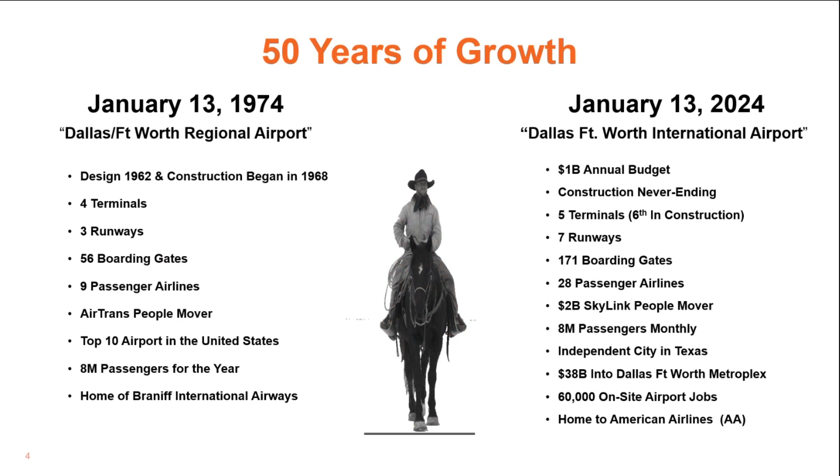So 50 years of growth from January '74 to now, there's a lot of things that really exploded - more runways, more gates, more terminals, more money, bigger budgets, etc. And here's some stats here. I'm not going to read them all to you, but here's some top 5 stats on the planet. We're being compared to airports like Shanghai, Dubai, London, and so forth. So it's right in your backyard.

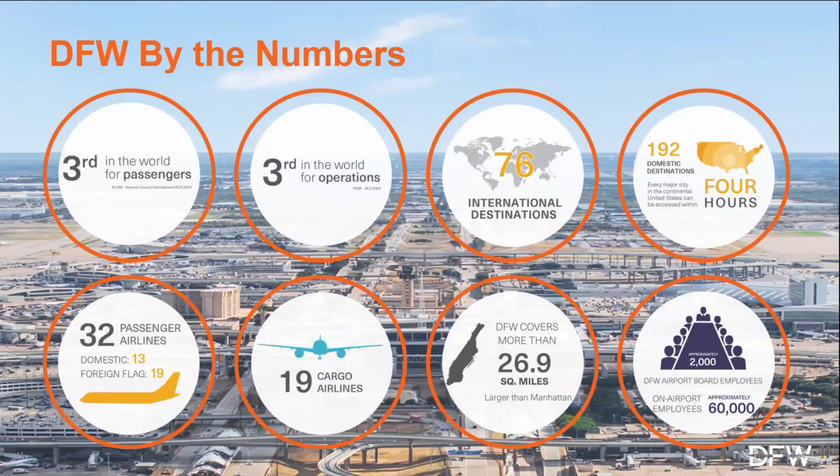So as you know, we're here as part of a monumental task, which is ongoing now. Billions of dollars going to be spent, over about 12 billion, on new capital projects. And there's more coming. This is just what we see now, but there's more coming over time in different phases and different fiscal years.

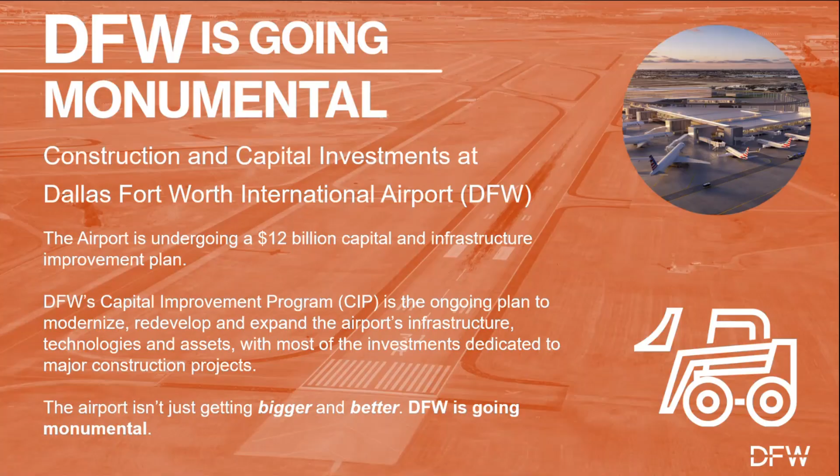We fixed them with fracture critical repairs to buy us time. And then it was decided, instead of putting these left-hand bridges back in where it's confusing and dangerous for getting people off the road, to put them to the right. And that's what this project's all about.

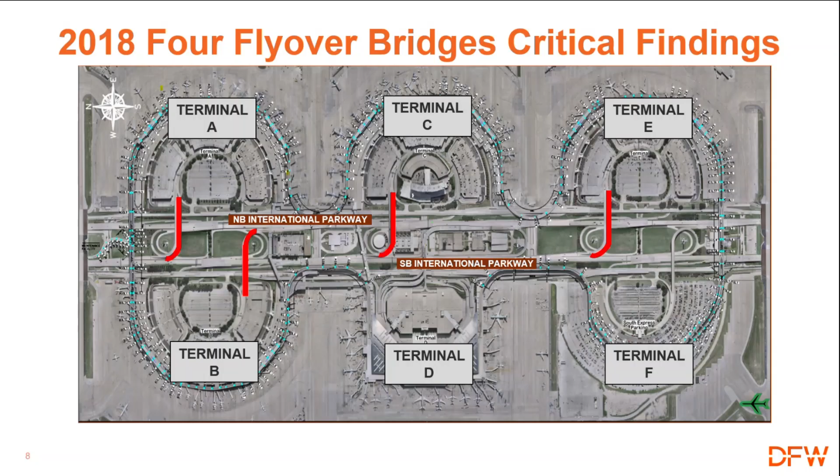So it's this bridge right here. And if you ever travel to the terminals, you had to cross it. It's a 755-foot bridge on the left side of the road, and it was built in 74 for fracture critical steel tub. And the problem is it ices fast in the wintertime, and that controls your passenger traffic in the wintertime.

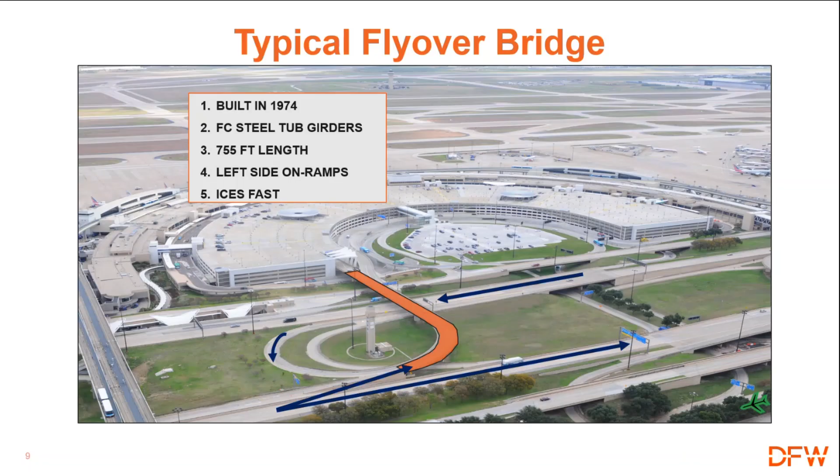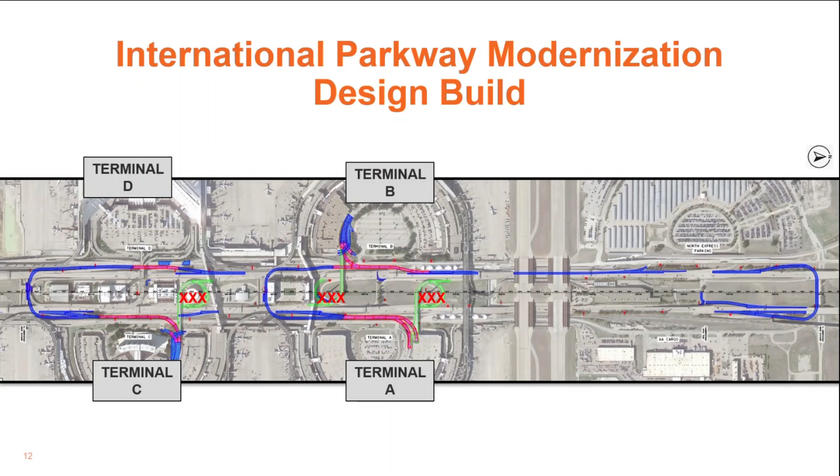And then, of course, our FIFA World Cup is coming up. So I asked for help. And the birth of the project is the International Parkway Modernization Design Build. And then my colleague, Veronica, will explain more details about it.

Good morning, everyone. So I'm the project manager for this baby that Harish gave us. I'm going to explain briefly about the numbers of the project and some of the details from inception to how we executed the project. So I'm going to give you a little background.

This project initially was a bid build project. What the owners saw along the design process, when they got to about 70% of the design, was that a lot of issues were not yet addressed. So we changed, or they decided to change, to design build. In this case, we have a qualification-based procurement, 2-step RFQ, RFP, and the importance of this is that the owner could perfectly cater what they wanted from this contractor. They highlighted experience and past performance.

We have requirements for firm and key personnel experience. Most likely, besides what we saw in resumes, we also called prior clients to verify how they collaborate directly with third parties. We also verified technical competence, construction phasing plan methodology, and we're going to see a lot of this in later slides. We also looked at safety, sustainability, quality control.

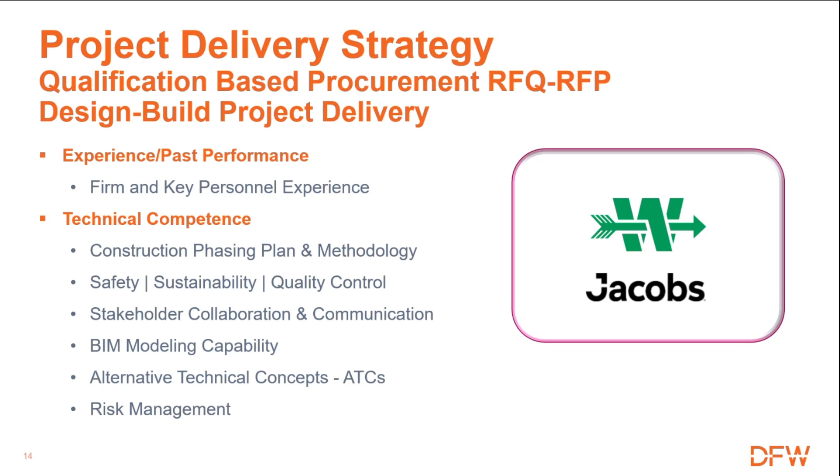Didn't mention, but of course, Jacobs and Archer Western were the ones chosen as the contractor for the design build. Now, one of the main items we want to highlight here is that the alternative technical concepts were ideas manufactured to be negotiated before we finalized the contract price. So for us, having this taken into consideration beforehand was a big advantage.

So we have here an example. What we see here in red was the original design. We see a lot of intervention, closures required to build these sections. So what the contractor proposed was to realign the entrance to the right exit to Terminal B. In this case, they also modified how the exits and entrances to the different terminals work, allowing us to avoid all these interactions and impacts into the terminals.

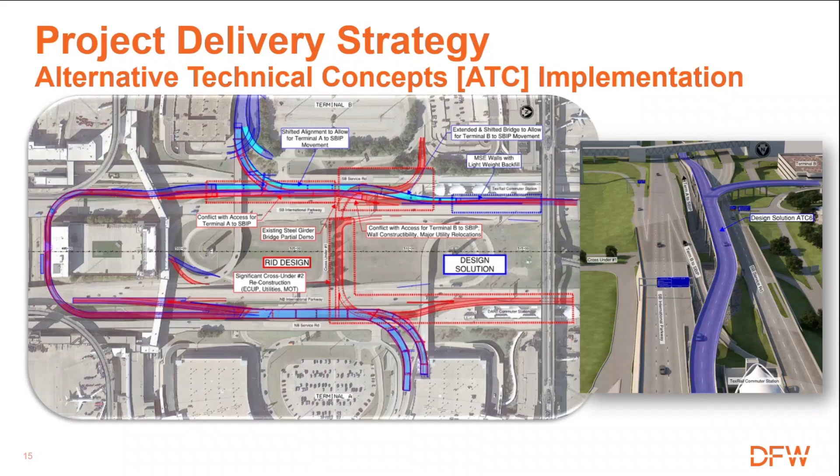So again, these were qualifiers that were considered when we were choosing our design builder. So the project by the numbers: the project was awarded, final contractual negotiated, at 206 million. Now we have contract plus change orders of about 365 million, and I will clarify, all of them were directed by the owner to address critical issues. The project length is about 3 miles. It does not sound like a lot, but this is a very restricted footprint, so we are going to see along the presentation how we address that.

Construction, MWBE goal: 30%, designs at 22%.

The proposal was due January 20th, and we notified the design builder on February 10, 2023. So you'll see a gap of about 9 months between the notification and when we provided NTP. I'd say this was a very intense negotiation, most likely to address those ATCs, and also for the contractor to work with us to adjust to the budget the airport had at that time.

We have substantial completion for base scope of October 14th of this year, and this is without considering major change orders that are modifying that date.

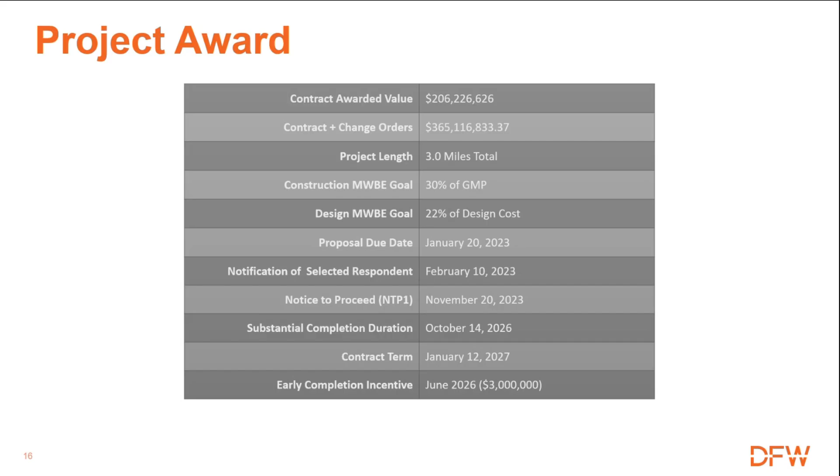This is the project schedule, most likely aligned with what I'm telling you. We already have terminals B and A open. We're working on C. Again, substantial completion for base scope is October 14, but we're shooting to have this ECI date of June 5th addressed.

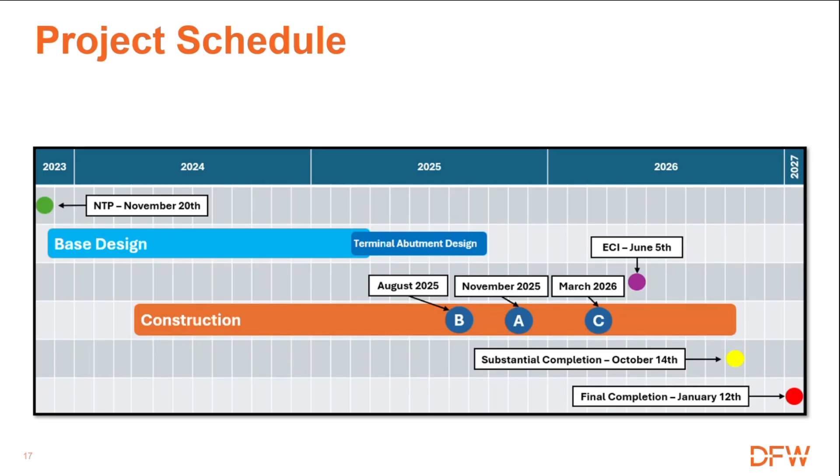Now, project execution. We're going to talk a little about design and the digital tools we're using. The main focus of the design development was to build with fast track, of course, the advantage of design-build, but also to do most of the work offline, doing the least impact to operations on existing traffic.

So what we have is that we scheduled the design deliverables aligned with the fast track construction timeline. Of course, there were early start of construction submittals that allowed the contractor to work as fast and as soon as possible, but also there were different adjustments like alignment adjustments to keep work off existing traffic routes.

Like you see in this picture, most of the alignment is off. We try to minimize as much as possible the impact. In this case, we're minimizing impact to existing infrastructure left in place, reducing the risk for utility relocations through design optimization, early coordination, and dynamic adjustment of maintenance of traffic.

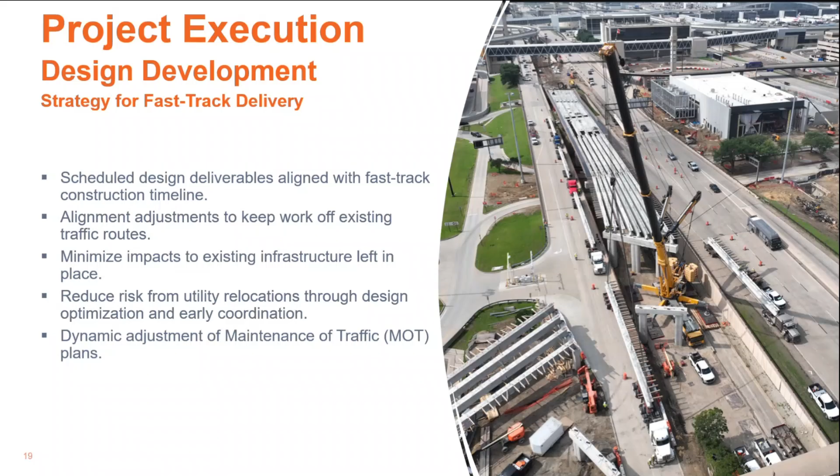These are a couple of examples of how we apply design optimization. In this case, this was the alignment I showed earlier, but then this was a further step where part of the infrastructure had to be built on top of the existing rail station.

What you see here in yellow are existing soil nails that had to be kept in place. So what we have to build here is the bent, an abutment, and most likely surgically identify where these soil nails were located, with a lot of potholing involved.

Besides that, to try to intervene the least and not produce additional loading into that existing wall, there was the use of this lightweight fill material made of glass. You can see here how the advance of this work took place.

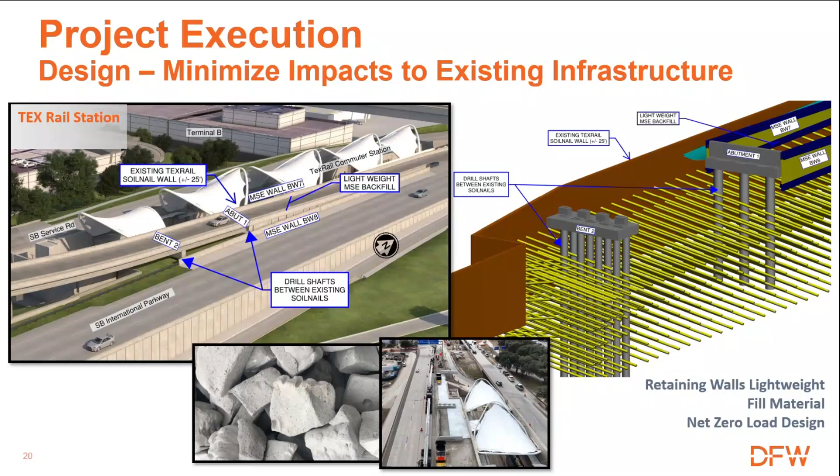Another major design optimization we saw through the project was the management of utility conflicts. Initially, we had about 114 identified potential utility conflicts. Through design, that was mitigated to only 9 requiring relocation. This was a big win for the team, since impacting one of these utilities is critical for the operation of the airport.

This is an example of jet fuel drain lines that cross between terminal A and B. In this case, instead of relocating or touching those drain lines—we know nobody wants to get delayed because there's no jet fuel in the airplanes—a protection slab was the solution.

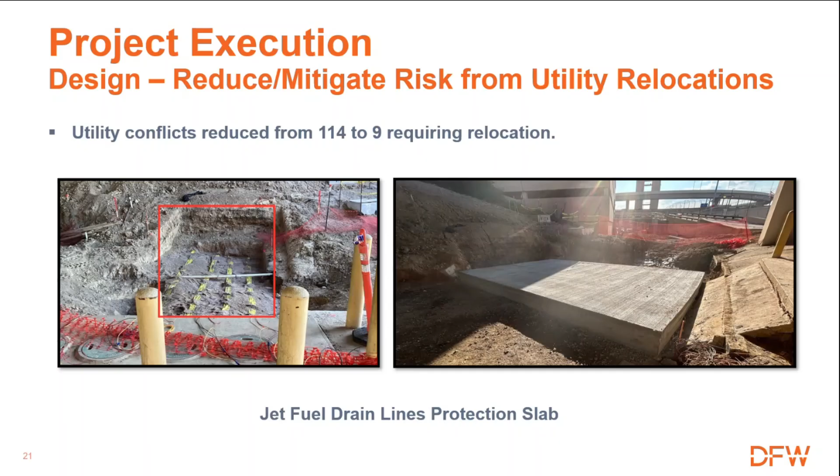Now I'll ask a rhetorical question: who here has arrived the 2 hours that the airlines recommend before your flight? Oh, a very good amount of people. That's good. I'm asking this because I want you to think about all the steps we take to make a closure.

Before we put a closure in place, we first align with the owner's moratorium schedule. For those not familiar with airport operations, the moratorium is a specific time where the major flight volume is taking place. It's seasonal, but also tied to specific events happening at DFW.

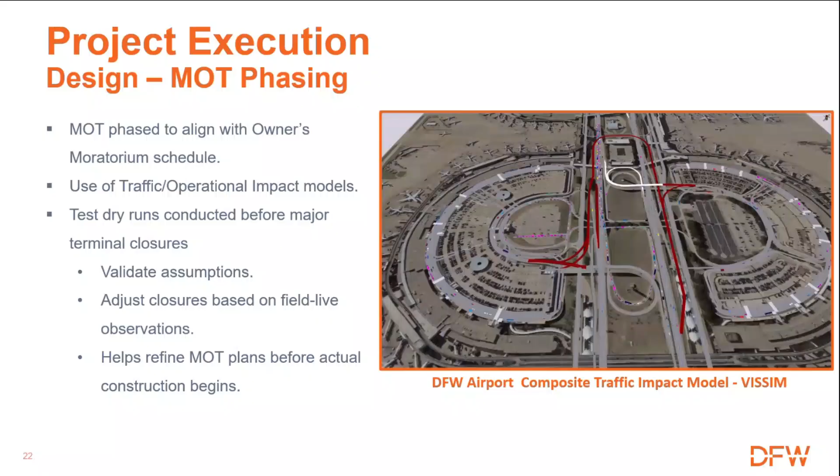We also make heavy use of traffic models. In this case, this is an example of a VISSIM model. We see how the model predicts the behavior, and then we make adjustments over every step.

After that, we also do test dry runs, so we test the closures as the condition is going to be during construction. Adjustments are made again, and we can validate those assumptions, adjusting the closures based on field live observations and then refining these MOTs.

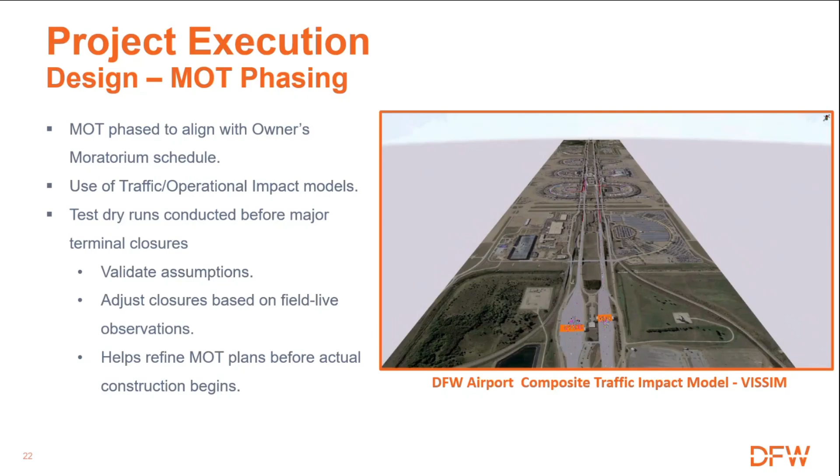Now we want to share a little of the technical, or let's say collaboration tools that we use. Of course, most of you are familiar with the use of Bluebeam Revu.

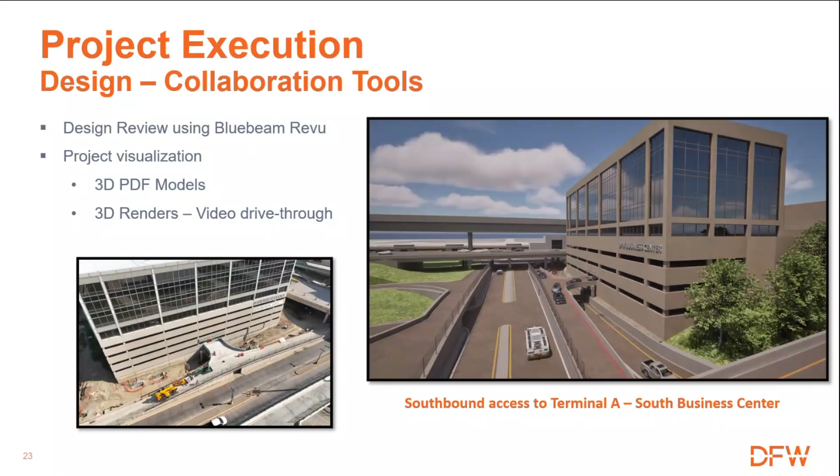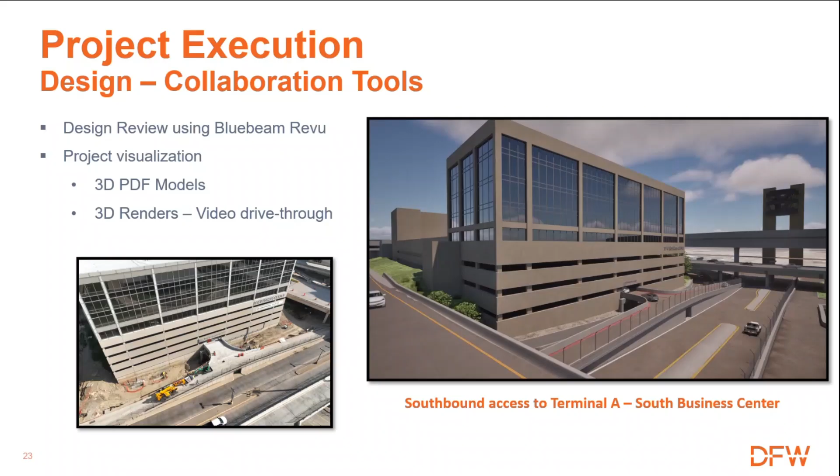We have project visualization tools like what we're showing right now, where we use 3D PDF models. These renders are very useful to communicate information with people that are not technical. They can show how their new route is going to function and also help facilitate why we need to do some closures. There are people who think, why do you need to do that? Well, we cannot build this bridge without taking it down. So these are tools that help familiarize non-technical people with how we are going to be developing construction.

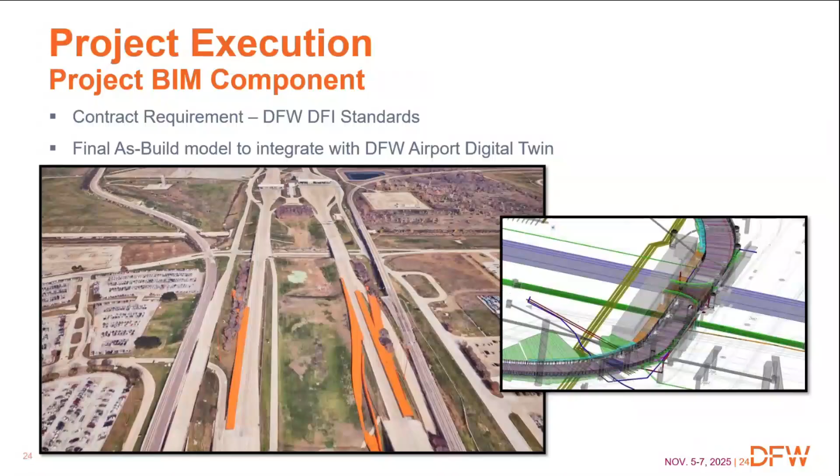How's it going, everybody? Did anybody happen to record that introduction? Nobody's called me distinguished before, so I want to show my kids that and take it back to the office. I've never been referred to as a distinguished guest, so I appreciate that.

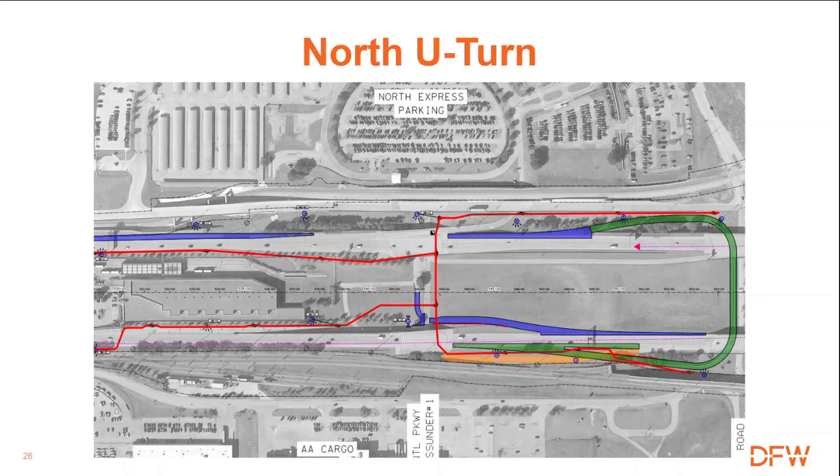Now, this wasn't always the alignment. The original alignment that was handed to us at the 70% level, which was developed by WSP, was what you see in red. So early on, when we got on board on the project, working with the PMCM team, we identified this as a potential area to mitigate some of the risks that we saw the project have, which start off by this area right here.

This is the orange line that was built some time ago. The original design had an exit ramp here that required us to build a cut wall using drill shafts. Those drill shafts, you can imagine the spacing of them, but not only were we having to install drill shafts here, there's also a soil nail MSE wall here that retains the orange line. So there was a lot of complex constructability issues there, but there were also some right-of-way conflicts and easement issues with DART.

So that being one of the scary parts, that wasn't the scariest part. The scariest part is this. You got a transformer substation over there for the Skylink system. So the entire Skylink system's power grid runs right through there. There was a lot of unknowns in terms of what that impact would be with the roadway running right adjacent to it.

So when we sat down with the PMCM team, we came up with this optimized alignment, which did add about 2 minutes to the travel time, but the airport saw the value and benefit of switching to the design here, which is what you see in blue. Later on, we'll have some pictures, and I think we also have a video of what that ended up turning into. It's currently open; it was open last fall.

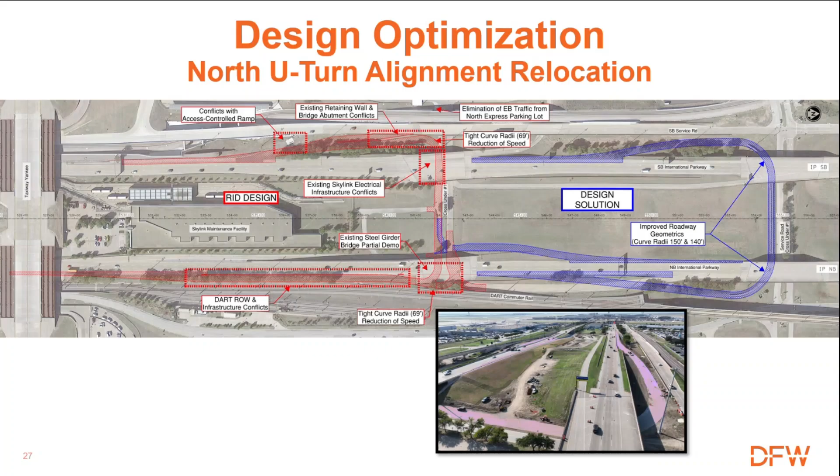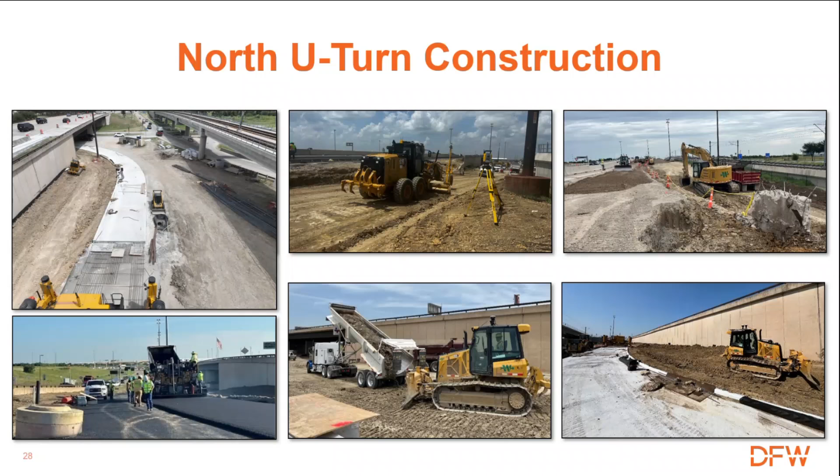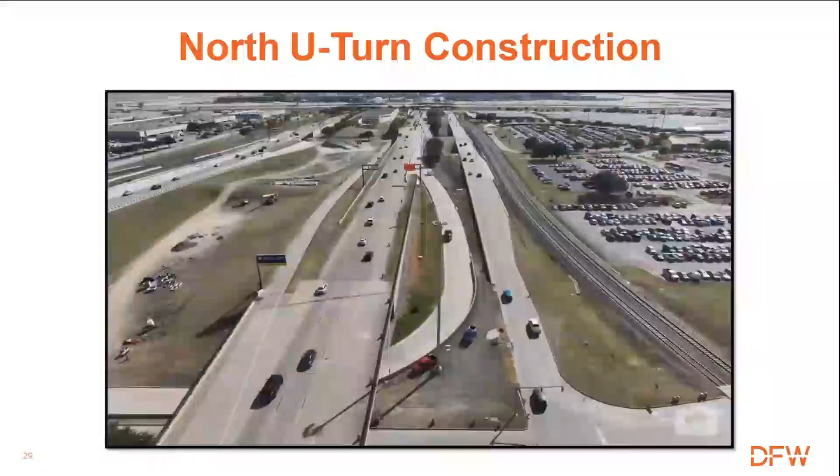And here's a video of what that alignment looks like. This is going northbound, this is east-west, and this is what the southbound direction looks like.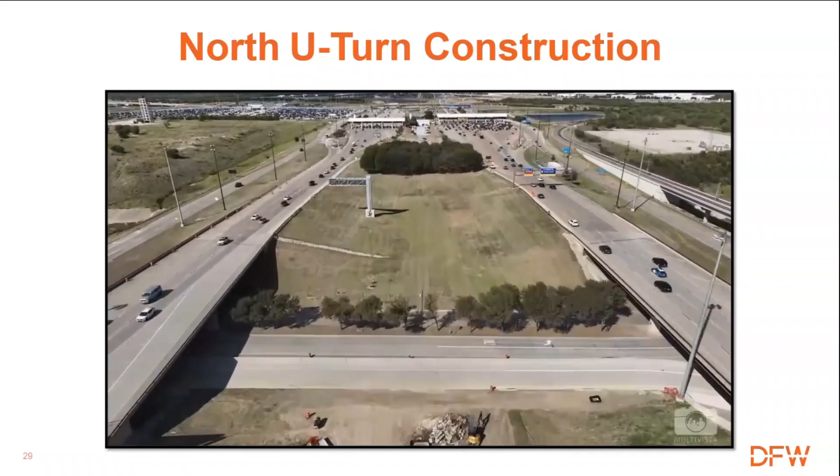We definitely spent a lot of money potholing to make sure that we did not run into issues. It was a Swiss cheese area, but I want to thank Jacobs. Lauren Van Andel was one of our design managers. It pretty much came to the point where it was like, where can we fit a drill shaft? It's going to go here. Designers, I don't care what you tell me, just make the numbers work, and we're going to go ahead and build it. Jacobs was very flexible and understood the situation we were in. I think that design changed three or four times before we finally got to where we landed.

What you see there is a solution that worked, and it was only possible via the design build delivery method. The importance of that, if I'm being honest with you, was not only the change of alignment.

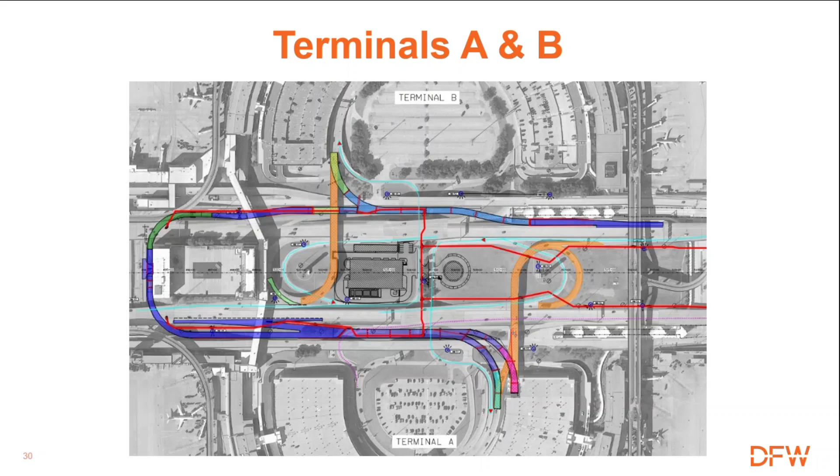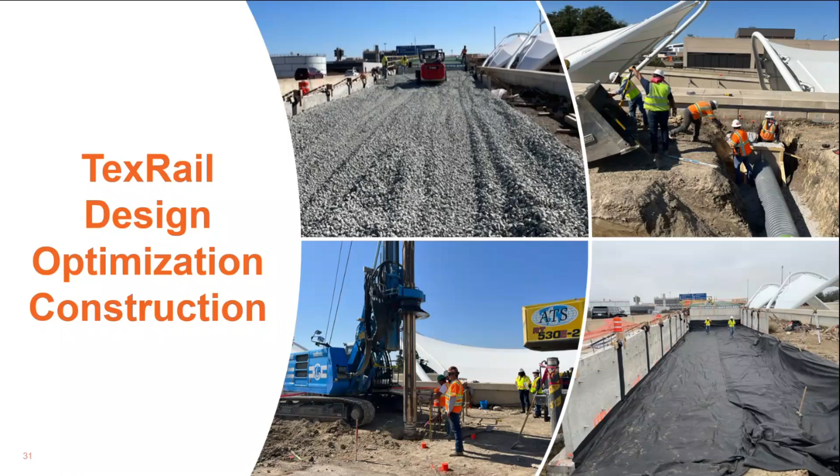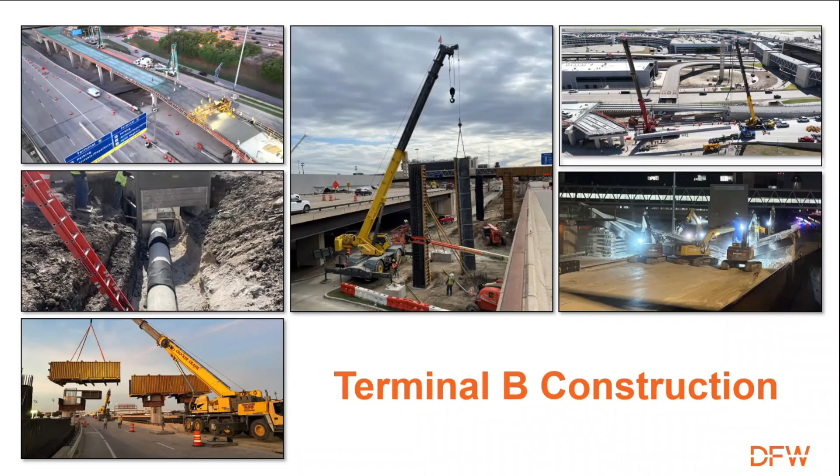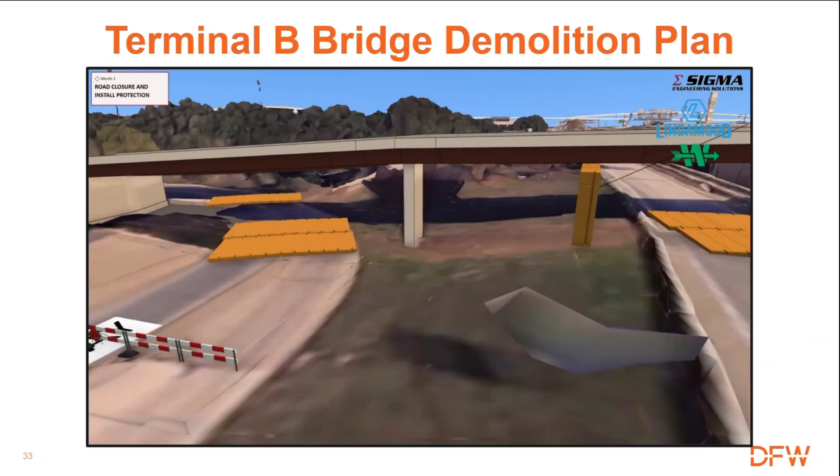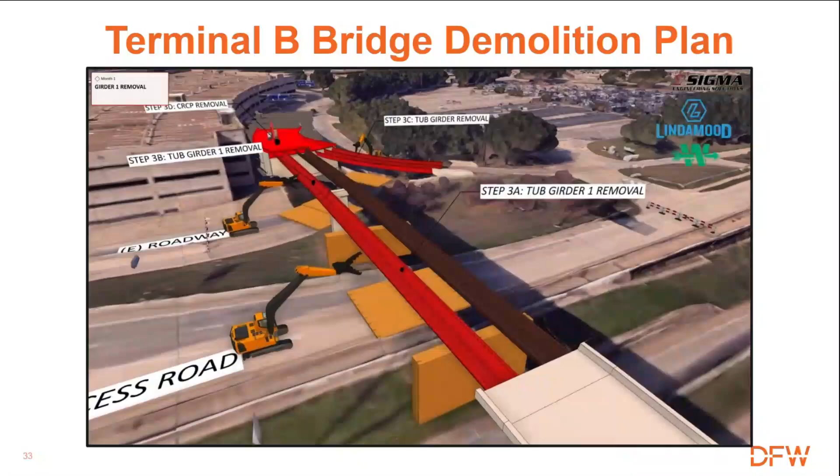We have some videos here that show how quickly some of the construction happened, coming right up. This is a video we created with Lindamood and Sigma Engineering out of Las Vegas. These videos have been very helpful for us to effectively communicate our plan to the owner rep, PMCM team, which is Veronica and her team. Her team then takes this and presents it to all the stakeholders at DFW Airport. You can imagine not everybody at an airport has a technical background or knows construction, so these videos are very helpful for them to effectively communicate what our plan is.

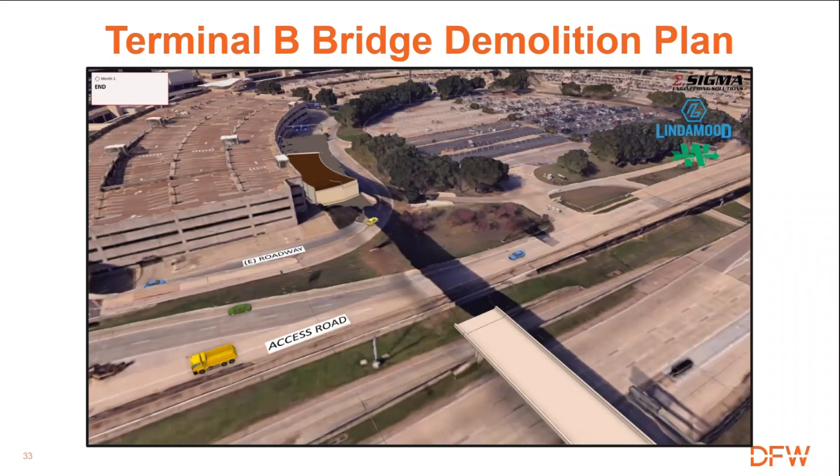This closure was permitted to be done over a course of about 72 hours, and Lindamood did a really good job beating that schedule. But this is what it looks like in real life - the pretty animation isn't always the way things turn out, but it gets pretty close. The rest of what you see here is the actual construction of how quickly our Archer-Western crews were able to rebuild the entire intersection.

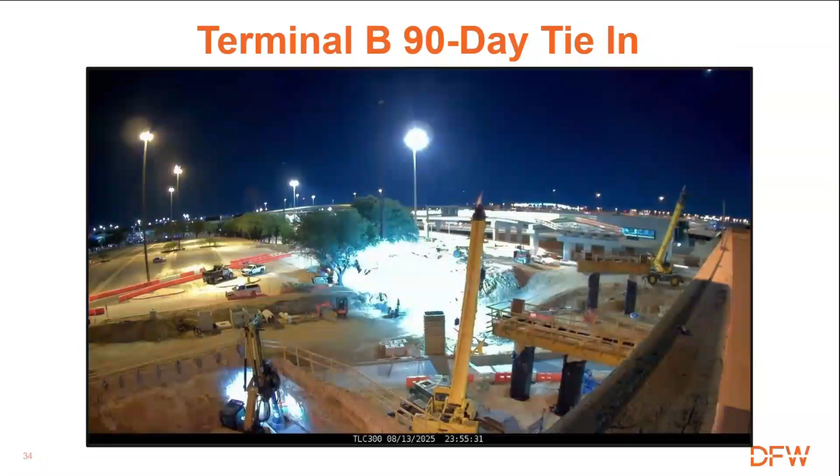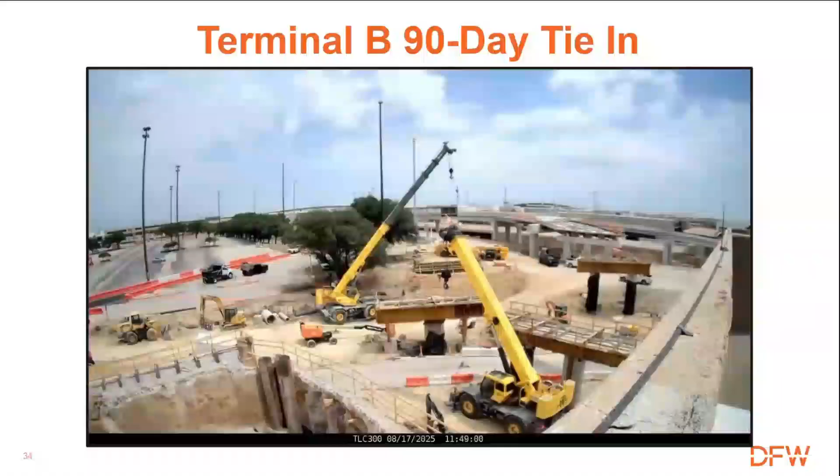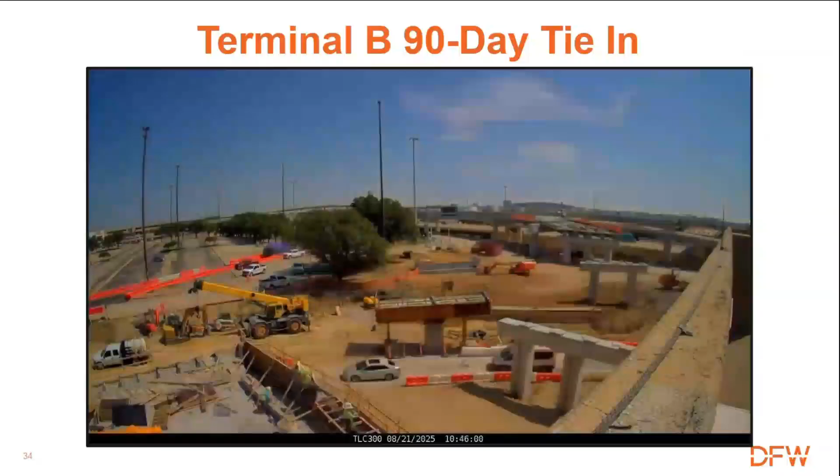We had 90 days negotiated with the owner to do all this. Now, it wasn't some kind of milestone, it was just our word that that's what we're going to do. In this particular location, we definitely beat the 90-day duration, and the owner was very happy with the results. Let this play out and you get to see how quickly this all comes together for us. We obviously were working day and night - you get to a point where we can't really double shift some of the activities, but wherever we could, we did.

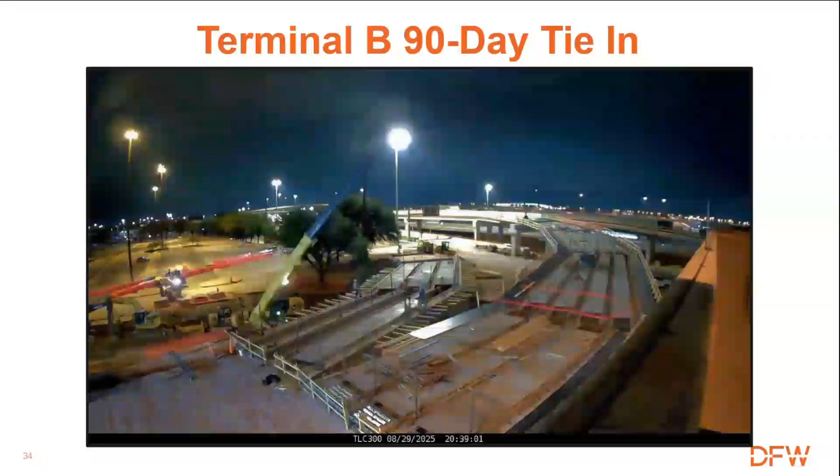The biggest thing too, I guess I should take a moment to pat ourselves on the back: we put in about 650,000 man hours on this project and we've had zero incidents, zero recordables. So it's been a zero, zero, zero project. We're very proud of that. Typically a safe job is a quality job and a profitable job, and it checks all three boxes for us right now.

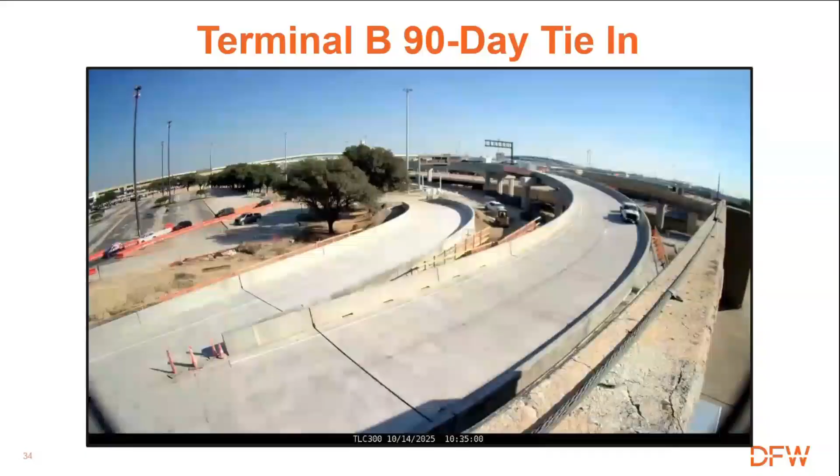That video shows you what the finished product looks like. Again, this was all built within less than 90 days. We just finished the lower roadway construction, which opened to the public Friday the 6th. All the lower roadway construction is now open in its current alignment, a new alignment.

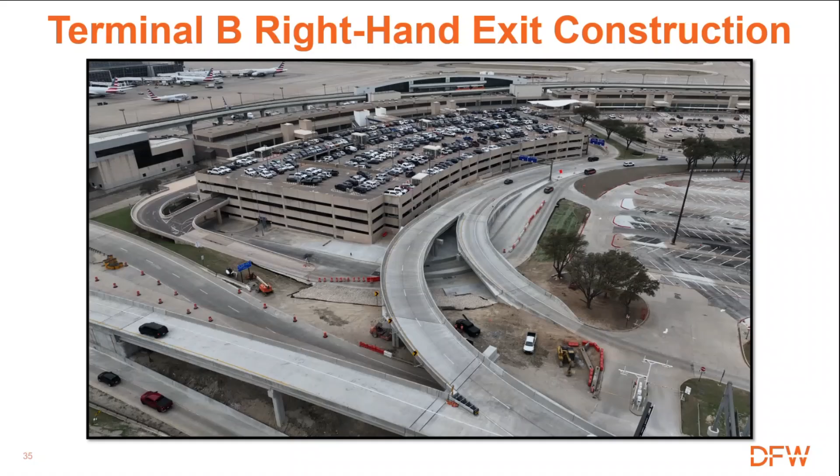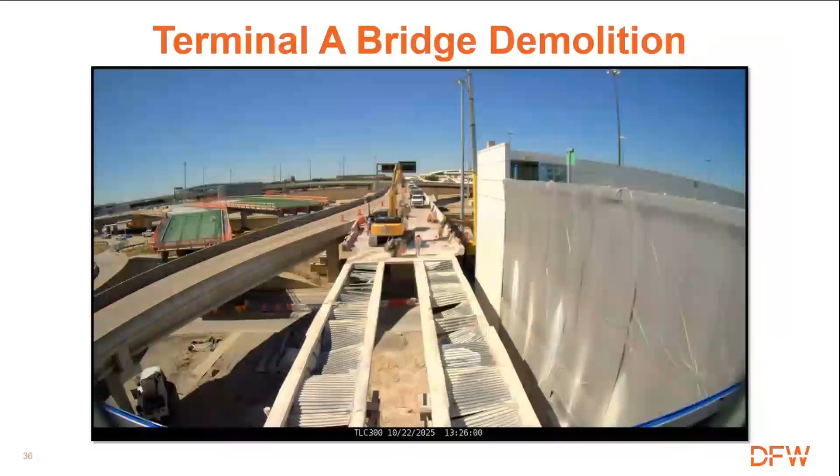Once we finished Terminal B, we moved on to Terminal A. Similarly, we had an animation that we provided the owner rep team, and they were able to go out and communicate that to all the stakeholders. This is Lindamood again, just executing their plan.

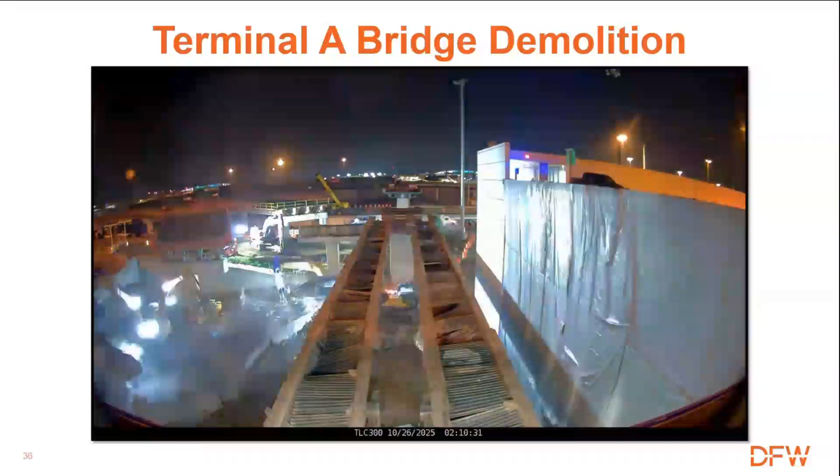Most of these closures were given less than 72 hours notice. In every single one of these closures, we've been able to deliver ahead of schedule. The airport's been really happy with us sticking to our commitments. You can imagine the impact these have on the traveling public. Every one of these has a detailed detour plan coordinated with the owner rep, and it definitely causes an impact, but it's as least intrusive as possible for the traveling public trying to get to their destination.

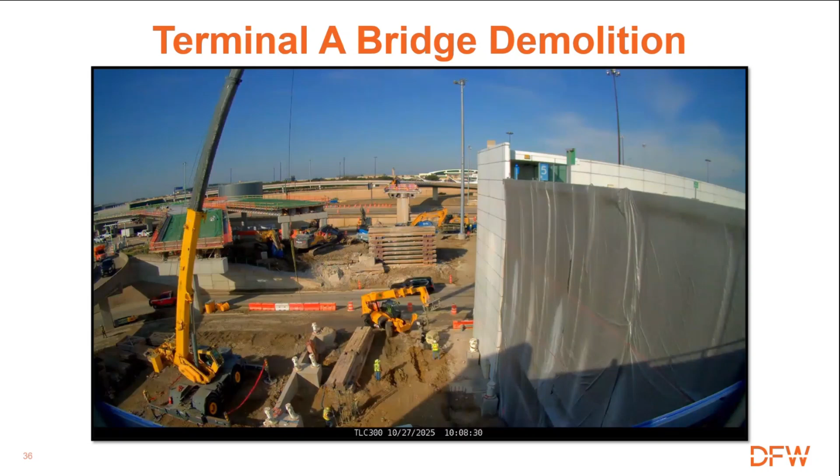Here's some pictures of the work to get us to complete Terminal A. This terminal was opened in two phases. The owner wanted us to open the roadway in an interim condition before the Christmas holiday. We were able to accommodate that. We got as much done as we could, opened it for the holiday, then reclosed it for a few weeks to finish the rest of the work. Now this terminal's fully complete and open to the public.

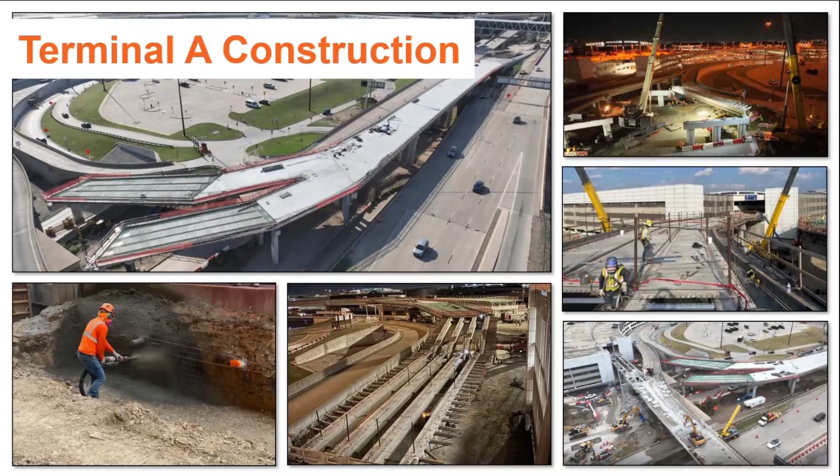There's a video of what it looks like now.

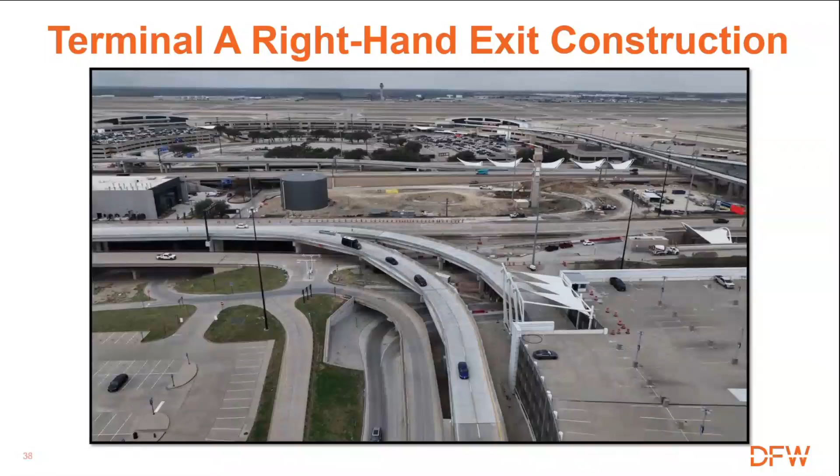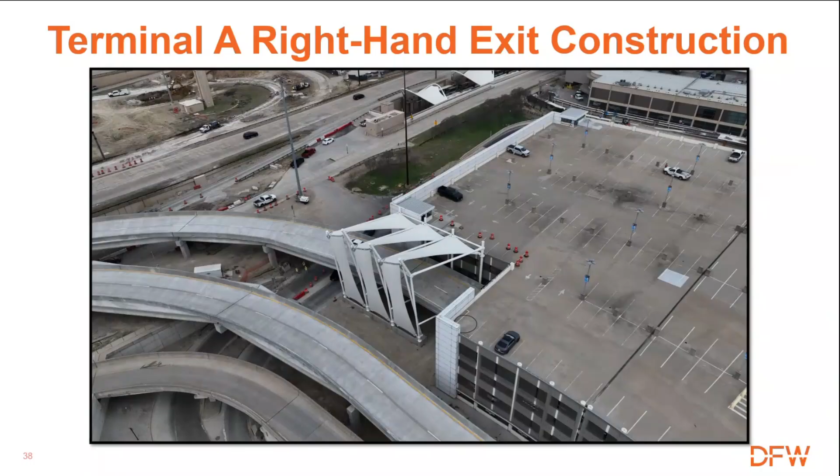The canopy here was one of the first things we took down on the project. We took it down, stored it, and our subcontractor ETS, who originally installed it, just finished installing all the fabric for that canopy, and that's now complete.

Terminal CD - again, all these footprints are very similar. You saw from Harish's presentation the layout of the airport is pretty much the same across the board. What you see here is the movement to get to Terminal C going southbound as this U-turn. Where Terminal B required the U-turn on the north side, if you're going south and want to get to Terminal C, you'll take this U-turn alignment into the terminal.

That's what's currently under construction, and the incentive date the airport set for us to finish before June 5th of this year requires us to finish this entire roadway alignment. This is all built up to about right here. We've got this U-turn section currently being worked on, and part of the off-ramp is actually getting poured today. The bridge deck, everything you see here in purple, is pretty much complete. We did start the terminal tie-in for Terminal C just last week.

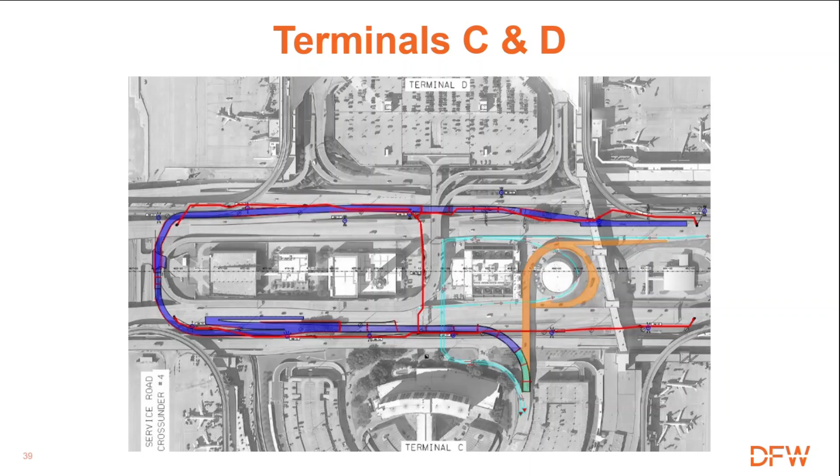I believe there's a video here. Oh, nope. Actually before I get to that, let's talk about another design optimization. I'm going to give Scott Yates some credit here - cost me a couple handles of whiskey, but it was very much well worth it.

WSP's design here in red was a cut wall section that required us to install the alignment for the U-turn, essentially cutting down about 15 feet of fill from the wall to top of pavement. The problem was we had a water line, a gas line, and this Oncor line that fed the FAA, with really no redundancy in place for us to relocate them. So we came up with a solution, primarily from Scott, where he raised the profile, met all the criteria, and essentially changed the condition from a cut condition to a fill condition. That area is now all complete.

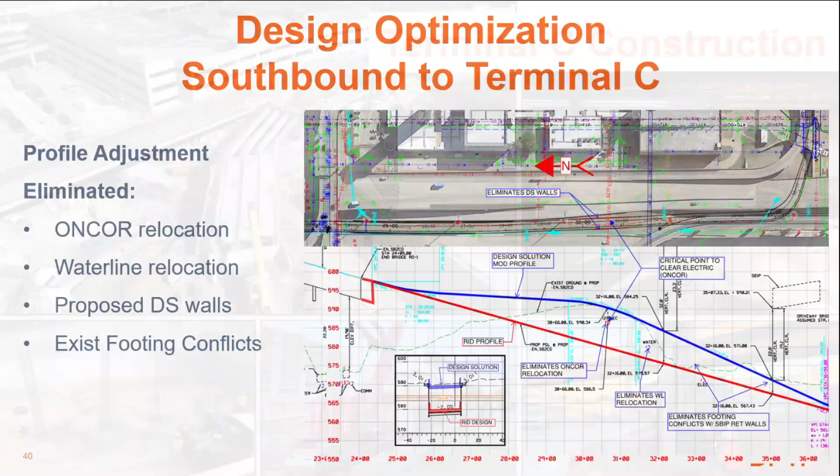Here's some of the pictures of the work.

This terminal was actually a little bit unique because of the way that the final design worked out - we didn't have the real estate available in the infield of this terminal, there's a big hotel there, the Hyatt Hotel. So we had to build this in phases.

We started here with the recirculation bridge. We got that done - it was probably like 52 to 54 days where we pretty much took it down, rebuilt it, and opened it. And we just started the actual main component, which is the terminal tie-in here.

I think you'll see a video here shortly that shows what it looks like now. Yeah, there you go. So that is a video of what it currently looks like now.

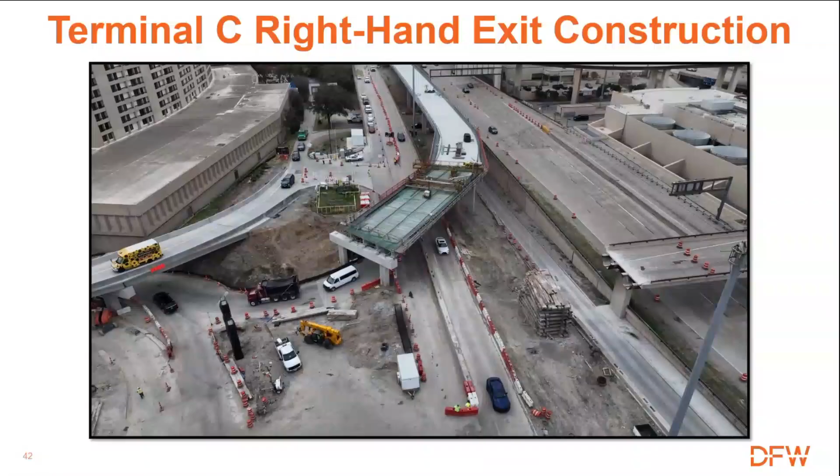All these caps here are already poured. We have beams coming in on Thursday. On Friday, February 27th, there was a bridge there, and now today you've got all the substructure done, and Thursday you'll have beams there. Probably by Monday, it's going to be fully decked out for us, ready to pour the following week.

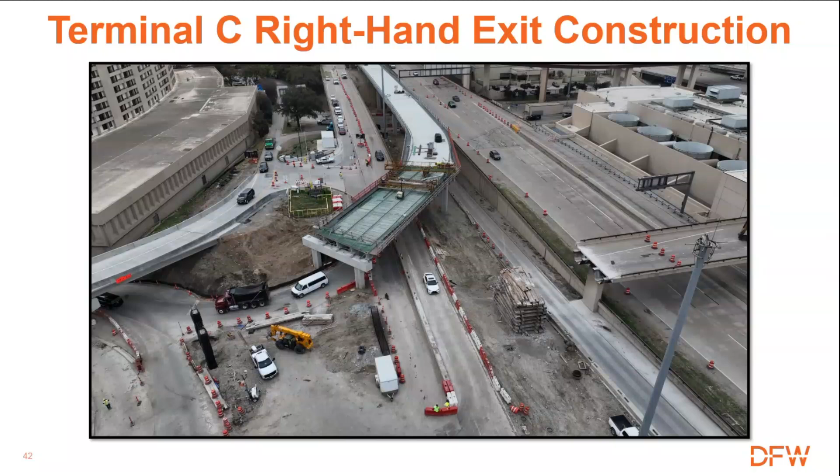Terminal D - there was no terminal tie-in, right-hand exit terminal to Terminal D, right? That terminal was redesigned, I think it was in 2002, when there was a reconstruction for what's called the paperclip bridges and all the roadway system there. But we definitely had to build in and around it.

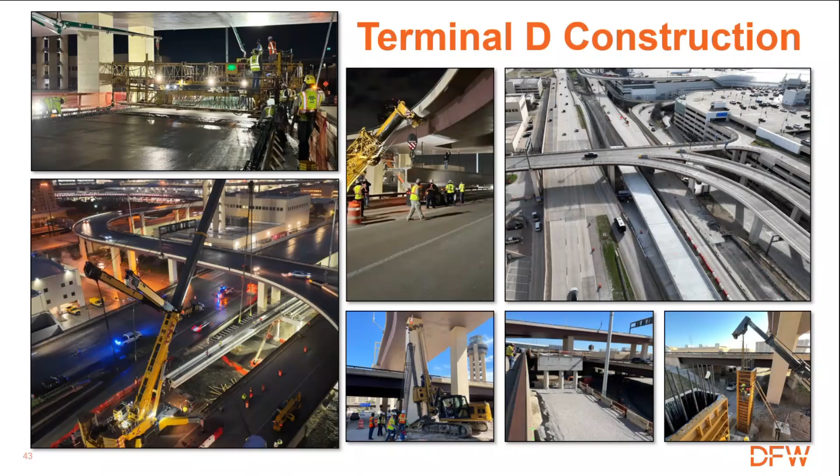So to the point that Veronica made, a lot of this project's been built in tight footprints, and our team's done a really good job in delivering that, again, without anyone getting hurt.

And to end the presentation, from a technology standpoint, one thing our project's done is we've implemented 4D scheduling for the project. A company called Kinkle Consulting out of Florida has been doing this for us, and we provide this to DFW - sometimes it helps them visualize the sequence of work. With this 4D scheduling technology, essentially it just shows you the 3D construction with the dates aligned at the bottom. And I believe that's all I got.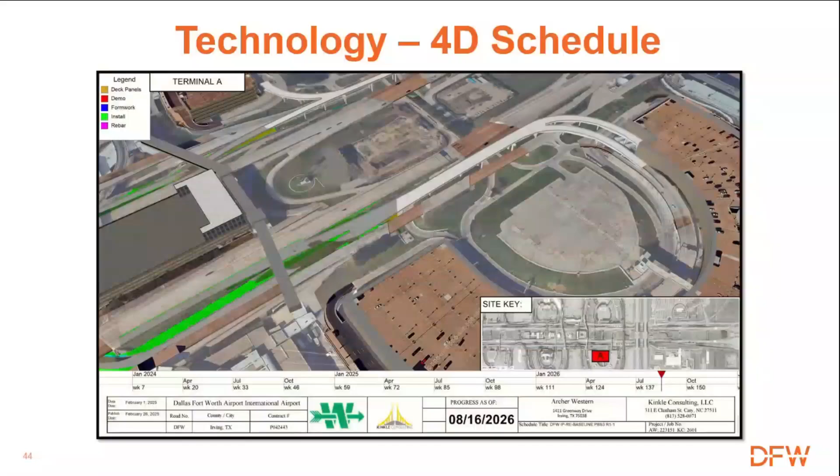I don't know if there was a picture. Let me see if I can go back and show you, if we provided a picture of the area. Yeah, unfortunately, we didn't provide one. This right here is probably the closest thing.

That area right there, we call it the Tracon U-turn. It's right in front of the FAA building. That's probably the tightest area within the project footprint that we have to build. That's where the critical path of the schedule is right now.

There was a lot of work that was done on the front end from a design perspective to essentially even get us a solution that worked. The owner had to make some concessions when it came to the design criteria to be able to come up with a solution. But I still am not 100% comfortable that we're going to be able to get all that done by June 5th. We're going to give it our best shot.

But when you talk about losing sleep, obviously I don't want to disappoint the airport with their expectation that we're going to be done on June 5th, especially given our track record that the other two terminals have been delivered ahead of schedule. But I do lose a little bit of sleep, get a little anxiety when I go out there and I don't see people working. So yeah, that would be it right there if I had to say what it is.

Yes, please. Great presentation, everyone. Just a question about the coordination. Obviously the operations, you're trying to keep one of the busiest airports operating. What does the kind of daily, weekly collaboration look like between contractor, owner, design?